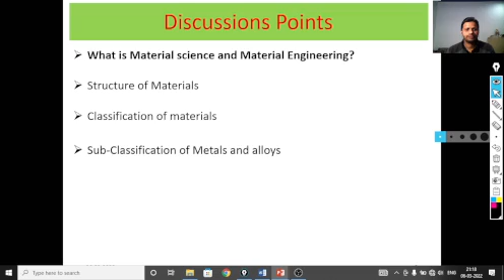So the discussion points for today's lecture are: what is material science and materials engineering, which is the very initial topic, and after that structure of the materials, then classification of materials, then sub-classification of metals and alloys, and finally why we study material science and engineering, why this is needed. So we will start with what is material science and engineering.

So material science is generally concerned with the basic knowledge about internal structure, properties and processing of material. Further, material science involves investigating the relationship that exists between the structure and properties of the material. And materials engineering involves, on the basis of the structure and property correlation, designing or engineering the structure of a material to produce a predetermined set of properties.

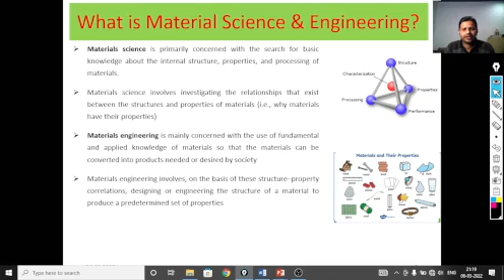So from a functional perspective, the role of a material scientist is to develop or synthesize a new material, whereas a material engineer is called upon to create new products or systems using the existing material and to develop techniques for processing material.

Actually, material science is related to the basics of the materials. What is the structure of the material, what are the properties of the material. Properties involve mechanical property, electrical property, thermal property, electromagnetic property. So material science is generally related to the very fundamental basics of the material, the fundamental properties of the material: what is actually at nano level or atomic level, what is the structure, what are the properties.

So suppose we have developed a new material and we find out the properties, now materials engineering will be involved to process the material, to develop the new product by using that material, and what is the application of the material newly developed by the scientists or researchers. So this comes under the category of materials engineering. Various materials such as boards, glass, wool, plastic, etc. have been shown in this particular scene.

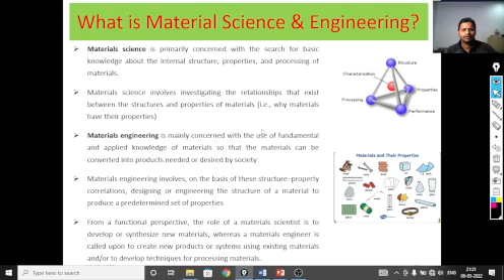Now move to the next one. So here a circular representation of information regarding materials has been shown. It consists of three rings. The inner ring is related to the basic sciences, including mechanics, physics, chemistry and mathematics of a material. And the second ring, the middle ring, is related to material science and engineering.

And finally we get the product for application in various fields such as engineering, mechanical, chemical, civil, medicine, aerospace, nuclear. So these are the various applications of a material. So overall there are three phases of a material. The basic science includes the mathematics and physics of the material.

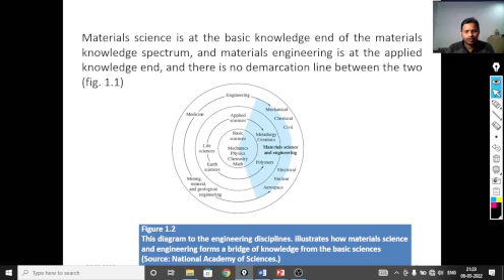Second one, now the material has been created, now we apply engineering to that material, and finally we use the product in several fields of day-to-day life. So materials engineering generally creates a bridge between the basics of the material and the application of the material.

So the next thing is structure of a material. So why do we need to study the structure of the material? The structure of the material is the basic fundamental thing; it includes which kind of crystal the material is, either a BCC structure, an FCC structure, or an HCP structure. So from that point of view we need to study the structure of the material.

So structural elements may be classified on size, because the material which we can see by the naked eye is known as the macrostructure: macrostructure, microstructure, nanostructure, atomic structure, and subatomic structure.

We cannot visualize these things with the naked eye. As we move from upward to downward, the size of the atom is decreasing, or if we move from subatomic to the macroscopic structure, the size is continuously increasing. Here the crystal is represented as the macrostructure. Then we move to the nucleus, molecules level, microstructure level, then atoms, and finally electron level. Here you can see the size is continuously decreasing.

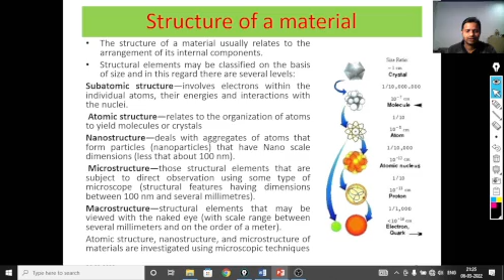We can only visualize the material with the naked eye at its macrostructure level, not the micro, nano or atomic level. At the atomic, nano and microstructure level, we generally use microscopic techniques. The atomic structure, nanostructure, and microstructure of the material are investigated or visualized using microscopic techniques, or microscopic machines like SEM and TEM are used to visualize the material.

Now we will move towards the classification of engineering materials. Broadly, all the materials available in this world, or the universe, are generally classified in three major groups. The first is metals and alloys, also known as metallic materials. The second major classification of engineering materials is ceramics and glasses, also known as ceramic materials. The third major classification is organic polymers, also known as polymeric materials. These classifications are also shown in this diagram of the major classification of engineering materials.

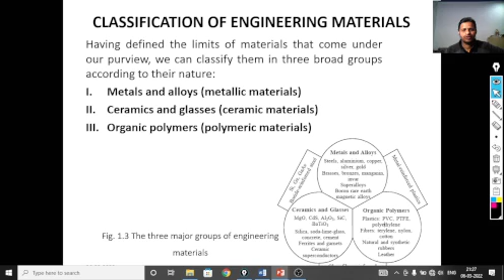So what are metals and alloys, and what characteristics or properties do they have? Generally, metals and alloys are inorganic substances composed of one or more metallic elements and may also contain some non-metallic elements. Metals are familiar objects with a characteristic appearance. They are capable of changing their shape permanently and have good thermal and electrical conductivity.

So metals are those materials where, if we apply a force, some kind of compressive or tensile force, there is a permanent change in their shape. They will not regain their original shape and size after removing the load. This is a characteristic of the material, and they have good thermal as well as electrical conductivity. As we are aware, copper, aluminium, iron and steel are good conductors of heat as well as electricity.

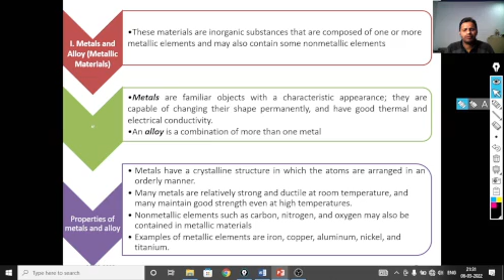Secondly, non-metallic elements such as carbon, nitrogen and oxygen may also be contained in a metallic material, in little portion or in little amount. Non-metallic material is also included in metals. Examples of metallic elements are iron, copper, aluminium, nickel and titanium. Further, these are the various metals and alloys which are shown in this diagram.

So further, metals and alloys are sub-classified into two categories. The first one is ferrous metals and alloys, and the second one is non-ferrous metals and alloys. As the name is saying, ferrous metal means the metals which consist of more quantity of iron or ferrous are known as ferrous metals and alloys, and the metals or alloys which consist of iron or ferrous in very less or negligible quantity are known as non-ferrous metals and alloys.

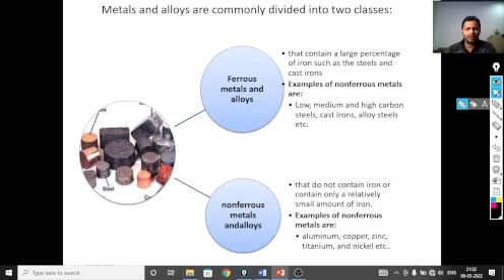So further, examples of ferrous metals are low, medium and high carbon steel, cast iron and alloy, tool steel, etc. And non-ferrous metals have been shown here: aluminium, copper, titanium, magnesium, superalloy, nickel, tin, zirconium, lead, etc. These are the further sub-classification of non-ferrous metals. Non-ferrous metals are generally copper, aluminium, magnesium, titanium. These metals consist of very less amount of iron, generally 1% or 2%. So these come under the non-ferrous materials.

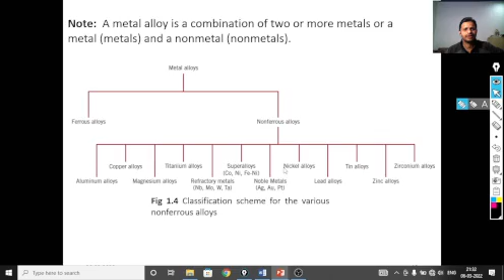And a very popular property of ceramic materials is that they have zero ductility, generally approximately zero ductility. It means their brittleness is very high. If we are applying compressive force or tensile force on the brick, it can break, but there is no change in the dimension. So they have no tendency to elongate or compress; they are brittle materials. If we apply force of any nature, either compressive or tensile, they can break, but there is no change in the dimension.

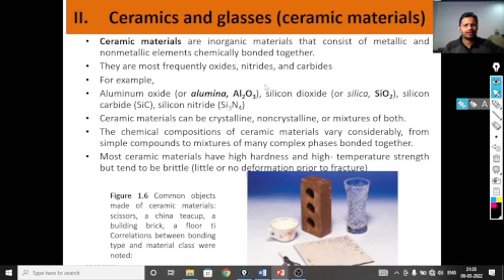Next is the third major classification of engineering materials: organic, polymer and polymeric materials. This terminology is generally used for materials which consist of carbon in major quantity, or whose structure generally consists of long chains of carbon elements. That's why these are known as polymeric materials. So they consist of carbon-containing precursors in huge amount, and generally the structure of polymeric material is non-crystalline. It means the molecules or atoms are connected to each other not in a defined order. They may be random; their arrangement is not regular.

Generally, these organic materials have low density. It means they have very low weight, and they have very low softening and decomposing temperature. It means they can withstand only a very low amount of temperature.

The strength and ductility of polymeric materials vary greatly, from low strength and high deformability, just like the rubber band, to high strength, low deformability and high durability, like the vulcanized rubber used in tires.

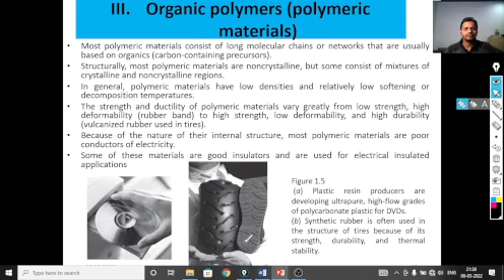Next, the last topic of this lecture series is why study material science and engineering, why this subject is necessary for you. So why do engineers and scientists study material science?

Because engineers or scientists work either in the practical laboratory or in the field, they have to deal with materials in day-to-day life, and even the work assigned to them is related to materials. If a civil engineer is making a bridge, he or she must know the material requirements for making the bridge: concrete, steel, etc.

Material scientists and engineers are the specialists in the field of material science who are totally involved in the investigation and design of materials and the invention and discovery of new materials.